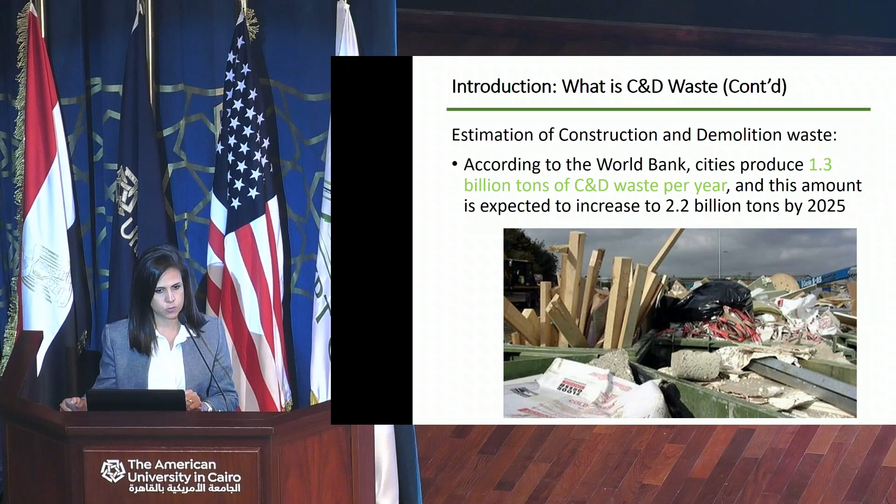reached uncontrollable levels. According to the World Bank, cities produce 1.3 billion tons of C&D waste per year, and this amount is expected to increase to 2.2 billion tons by 2025. C&D waste constitutes a third of the world's overall waste and 40% of the world's carbon dioxide emission. It is the largest waste stream in the EU by weight and is more than half of the total garbage generated in the European Union.

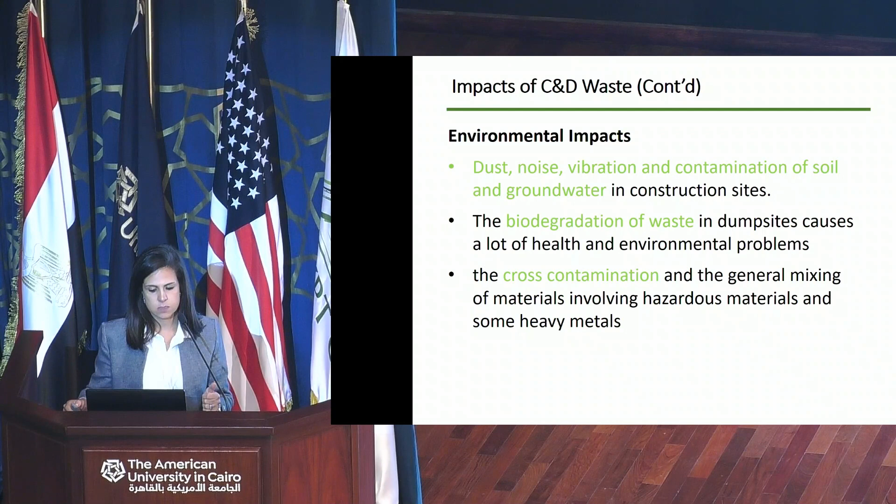The C&D waste accumulation has significant impacts, like environmental impact, socio-economic impact, and sustainability impacts. Some of the environmental impacts are the dust, noise, and vibration contamination of soil, always found on construction sites, the biodegradation of wastes in dump sites, and the cross-contamination and the general mixing of materials.

Some of the socio-economic impacts are the loss of value which would have otherwise been utilized. Recycling offers a boost in the economy by providing more job opportunities, and also the accumulation of waste causes negative effects on health, ecology, and aesthetic sensibilities.

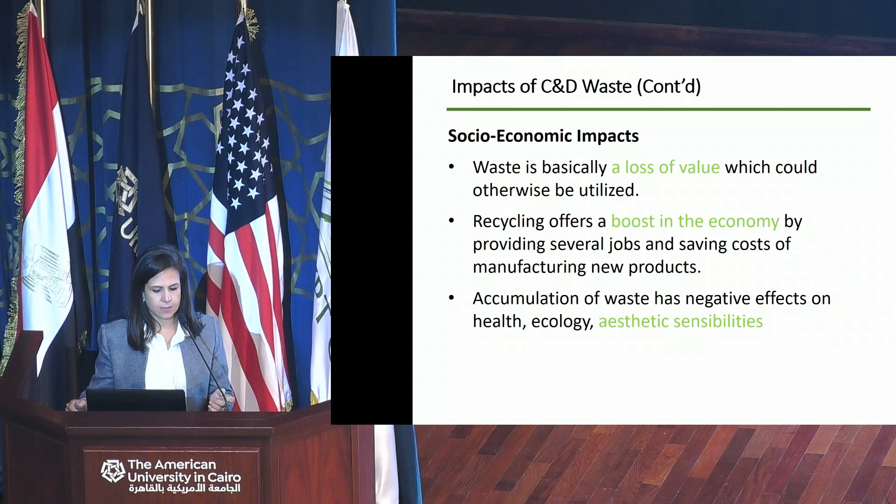Construction industry is one of the largest and main consumers of natural resources and one of the largest polluters. It was estimated that in Europe, over 40% of energy and approximately 40% of the solid waste are building related. Dumping C&D waste has negative impact on society, the environment, and the economy, which are the triple bottom line of sustainability.

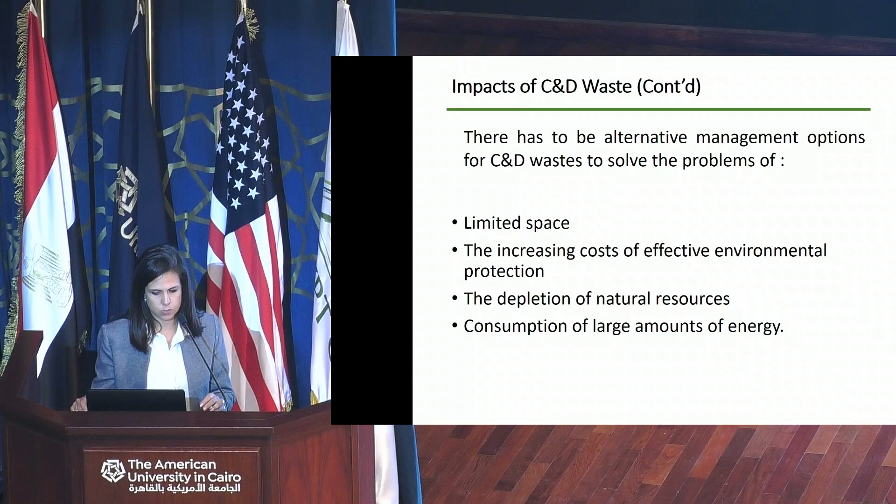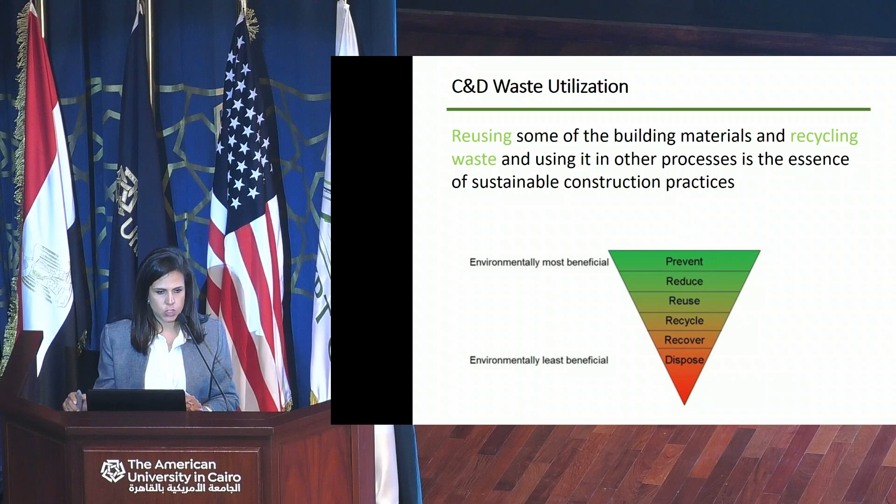There have to be alternative management options for C&D waste to solve the problems of limited space, the increasing cost of effective environmental protection, the depletion of natural resources, and the consumption of large amounts of energy. Now, it's important that C&D waste is not simply dumped, but reused and used as a new source. Reusing some of the building materials and recycling waste and using it in other processes is the essence of sustainable construction practices. Many of the components of C&D waste have been subject to lots of research about recycling and reuse.

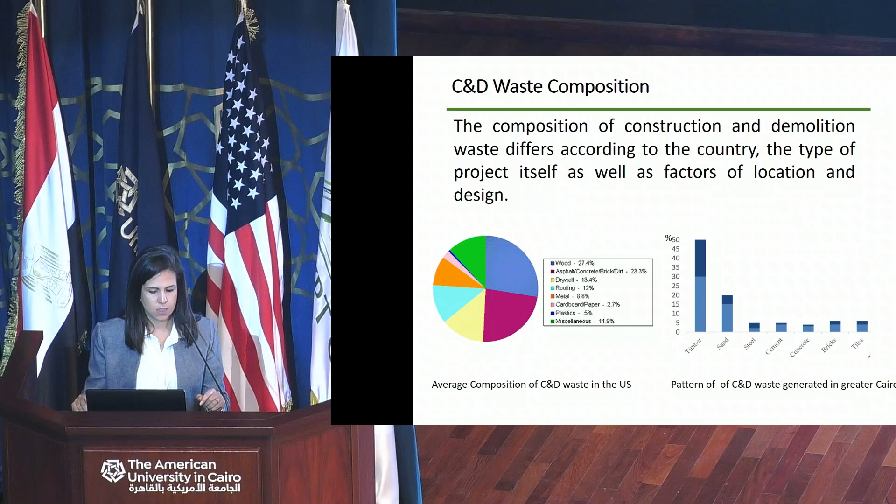However, the composition of construction and demolition waste is not the same for all projects. It depends on the country, the type of project, and many factors of location and design. Here, for example, we have the average composition of construction and demolition waste in the US, and a pattern of construction and demolition waste generated also in Greater Cairo.

Concrete: we will talk about some of the elements that we see are common in most of the construction projects. Concrete is the most common waste material. It's involved in almost all construction work, and that's why concrete production is always on the rise. It comes second in construction materials consumed after water, and according to the EPA, concrete waste accounts for about 67.5% of all construction and demolition waste by weight.

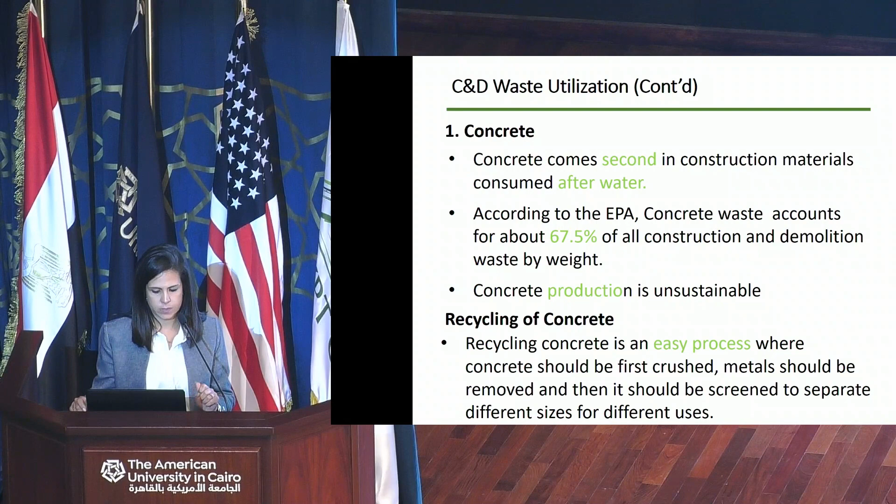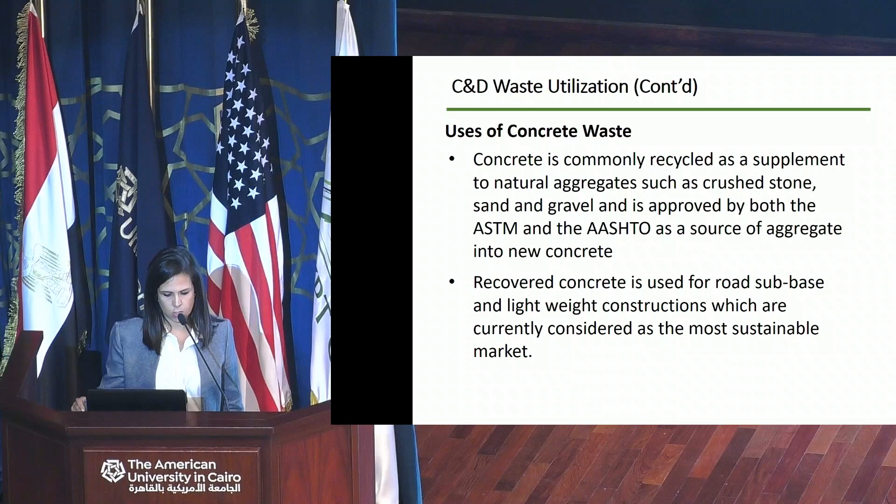New concrete production itself is unsustainable since it uses a lot of natural resources and emits a lot of greenhouse gas. Recycling of concrete is an easy process where concrete should first be crushed, metal should be removed, and then it should be screened to separate different sizes. Concrete is commonly recycled as a supplement to natural aggregates, such as crushed stone. It can also be used for road sub-base and lightweight construction.

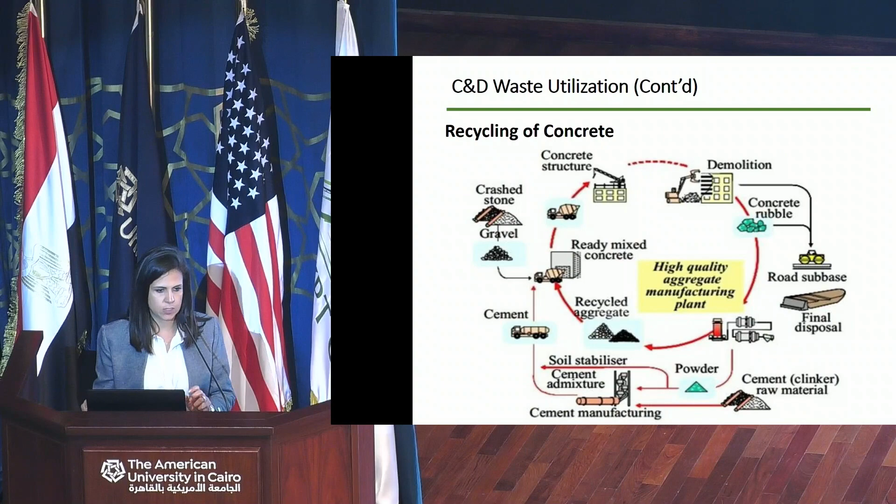As we can see, the concrete coming out from demolition sites, which is named concrete rubble, is used for road sub-base, sometimes in high-quality aggregate manufacturing plants, and at other times in cement manufacturing as well. Lots of countries have recycling plans for C&D waste concrete and are actually attaining very high recovery rates, like Germany, the Netherlands, Belgium, and Japan.

Wood is another material that is common in almost all construction. It is widely used in structural framing and for doors and windows. Dumping of C&D wood waste, however, is dangerous since it releases methane gas to the atmosphere and causes hazardous effects.

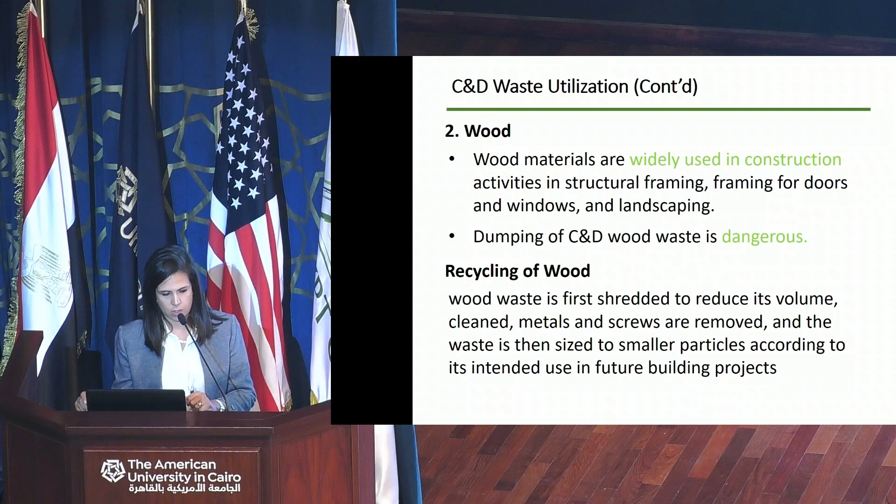Wood waste is first shredded to reduce its volume, cleaned, metals and screws are removed, and the waste is then sized to smaller particles. It can be used as soil amendment, compost, or as an ingredient to manufacture pulp and paper products. Some can be used in furniture applications, and some as alternative fuel because of its low moisture content.

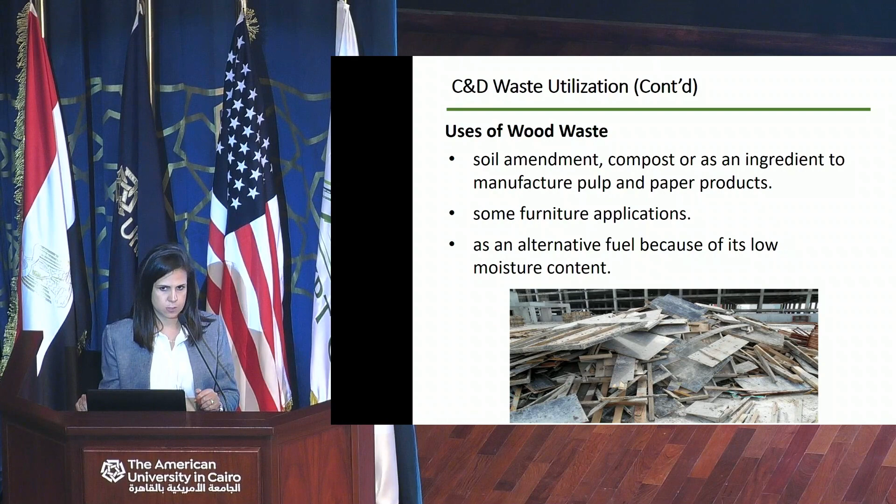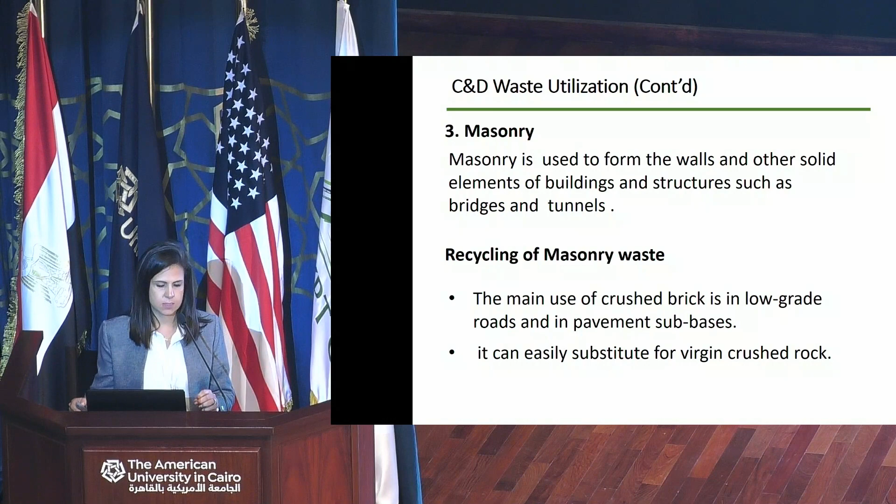Masonry is used to form the walls and other solid elements of buildings and structures, such as bridges and tunnels. The main use of crushed brick is in low-grade roads and in pavement sub-bases, and it can easily substitute for virgin rocks. Mixed waste from demolition is found everywhere in all demolition sites. It's just demolition waste together that cannot be separated; a mix of mortar, concrete, and gypsum is most likely to be found at demolition sites.

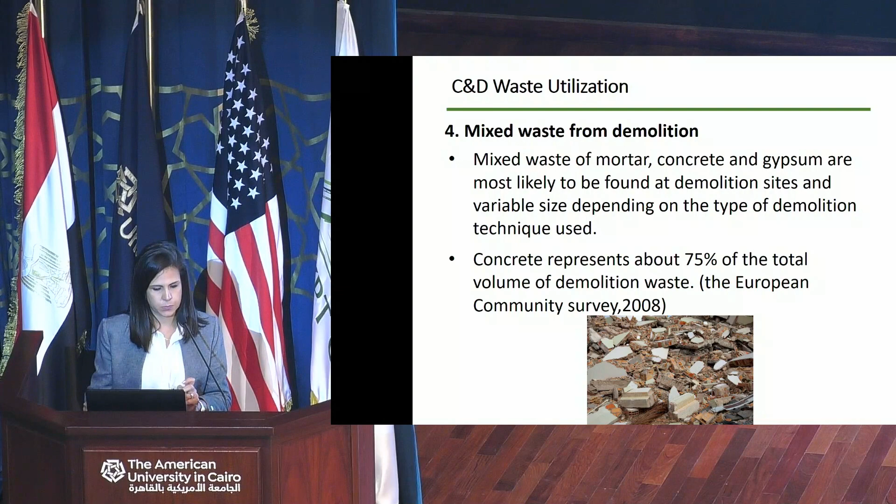The size of the particles of this mixed waste depends on the type of demolition. Concrete represents 75% of the total volume of this demolition waste. It can also be used to generate recycled aggregates by a very simple procedure of crushing the debris to a small size. The contaminating elements of the waste are eliminated, and the aggregate is sieved and stored according to the correct size.

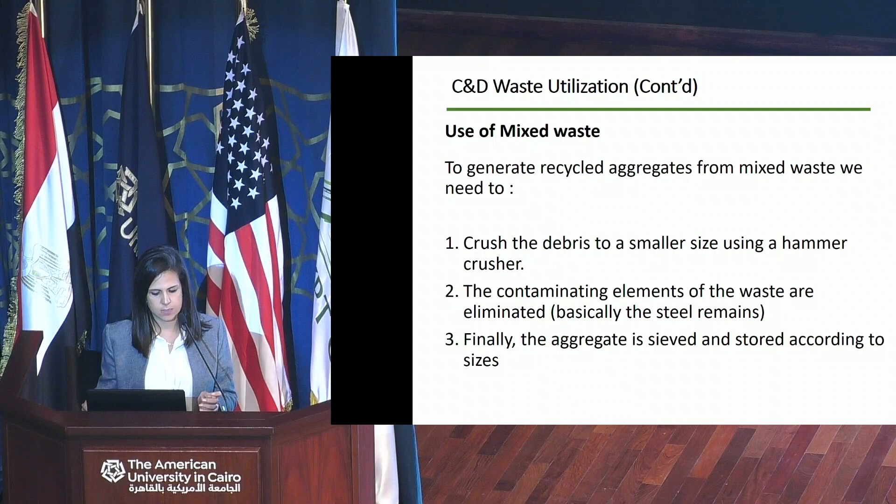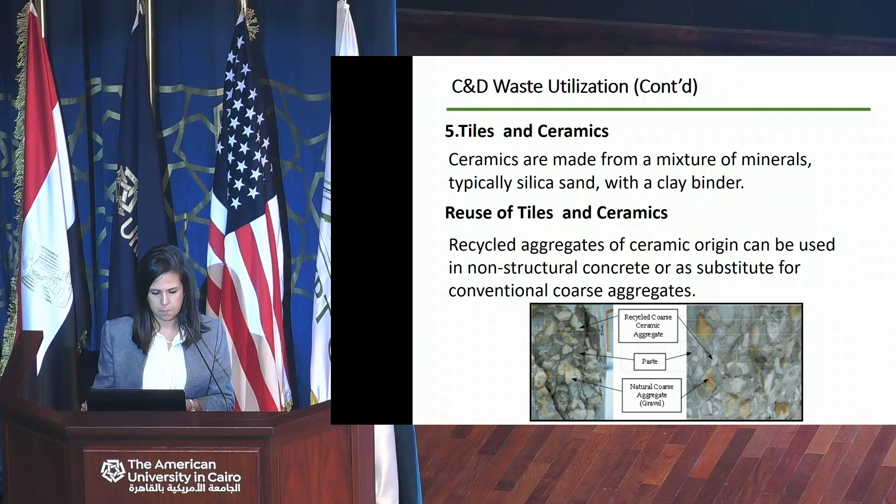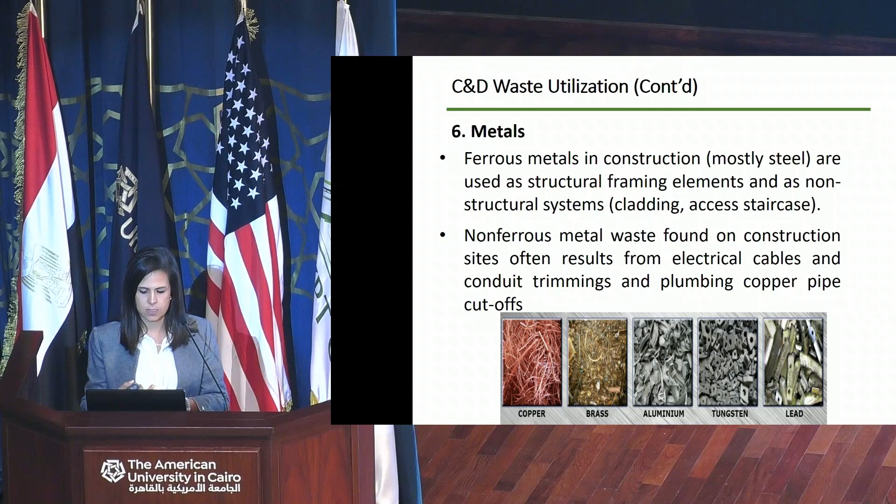Metals in construction, mostly steel, are used as structural elements and also in non-structural elements. Non-ferrous metal waste found on construction sites often results from electrical cables and conduit trimmings. Ferrous metal waste is usually minimal because the material is expensive, therefore the quantity needed is correctly calculated, and the only waste exists as a result of inaccurate drawings or steel cut-offs, and it can be easily sold for money after that.

Ferrous metals can be completely recycled with very little waste and are repeatedly recyclable. Non-ferrous metals can be separated before reuse. Scrap is cleaned, melted, impurities extracted, and the residue recast into other useful products. What we talked about now are only examples of recycling or reusing some of the most common construction and demolition waste, and they have all proved to be successful.

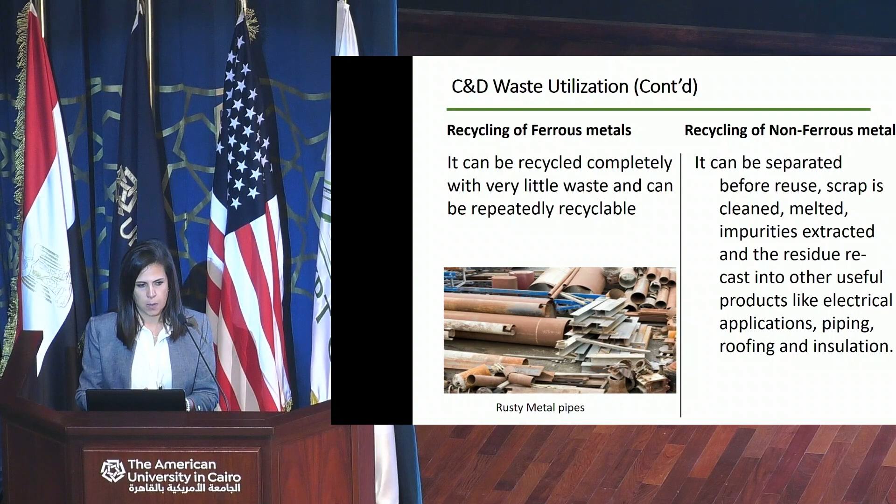So C&D waste, being one of the major solid waste streams in any country, should be a great potential and not a threat. It should not be dumped, but rather should be considered a resource. Reaching net zero C&D waste helps to achieve the optimum use of natural resources, reduce the negative effect of waste accumulation, and reduce energy consumption. C&D waste has to move in a circular system following the cradle-to-cradle approach in order to achieve net zero waste.